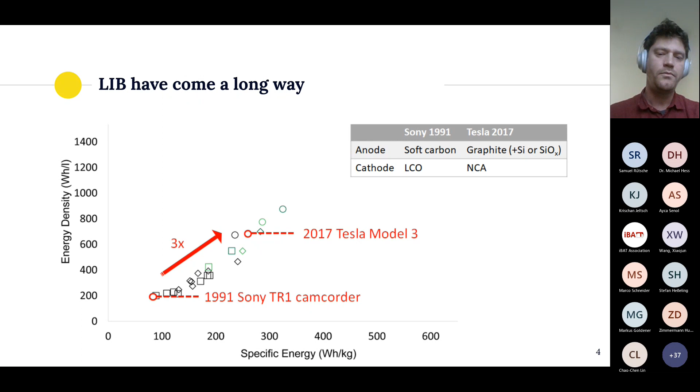However, nowadays we're sort of reaching what we think of as a practical limit. The cell design uses housings, current collectors, tabbing, all these design aspects that prevent us getting the most out of the theoretical limit of these batteries. So in terms of volumetric and gravimetric energy densities, the state of the art, which uses liquid electrolytes, is almost reaching a limit. They're still fairly expensive.

Well, every once in a while you hear about automakers that promise cheap electric vehicles, under 20,000 francs or dollars, maybe even less, but we're not quite there yet. And in terms of charging times, it's still underwhelming if you need to tell a petrol head that he has to stop for 30 minutes. And two aspects that gain more and more importance are safety and sustainability. As the battery market grows, those 2 points become more and more important.

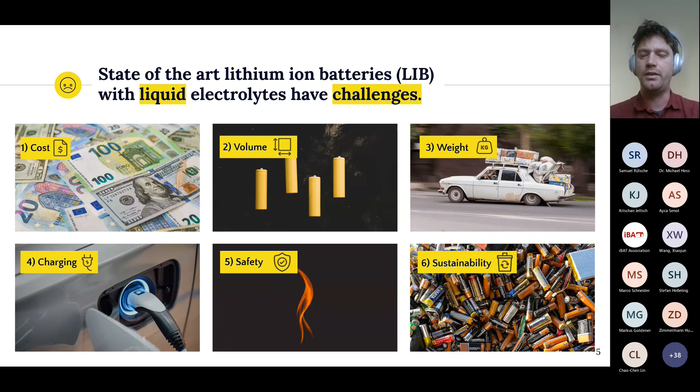And I really liked the publication by Placke, I believe it was in Nature Energy in 2018, that tried to summarize the ceiling of new battery materials and designs. And it becomes quite apparent that with the state of the art, it's really difficult to get another factor of 3 out of the performance of these types of batteries.

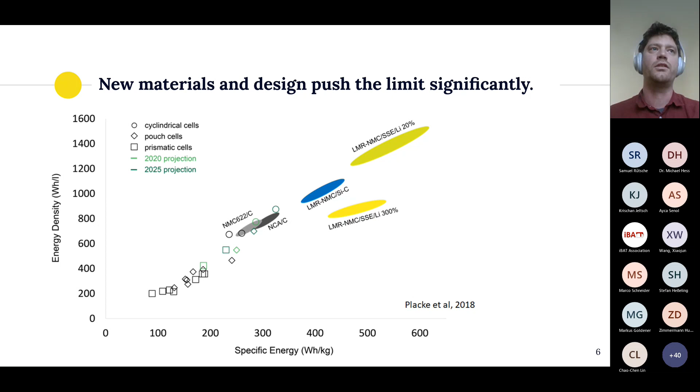But if you look beyond the state of the art, and solid-state electrolytes are probably closest on the development timeline, you see that this technology shift pushes the limit of battery technology significantly. And this is really, I believe, or what we believe at eightinks, what makes car companies and battery manufacturers pursue these types of designs, these types of materials. Not just the performance that they show now, but the potential that this technology brings.

And in our opinion, the future or the near-term future of lithium-ion batteries is very much linked to the future of e-mobility. The demands that this sector poses to the batteries are very, very high. The performance needs to be very, very good, so the automakers drive the technology development. Not necessarily in-house, but the market has such high demands on this technology that it's really difficult to focus on niche markets. And if you look closer, you can find this basically in every other battery report that focuses on the future of these different markets and sectors.

We are past the stage of the early adopters. I think lithium-ion batteries in the electric mobility field are here to stay. It's fairly clear. But the speed at which the market grows is mainly defined by the performance and the cost in the future. So this sector is developing very rapidly. The supply chain is being developed, and this is very hard to predict exactly. But in any case, it's a very, very fast growing sector at a very, very large size, which is unique for our generation.

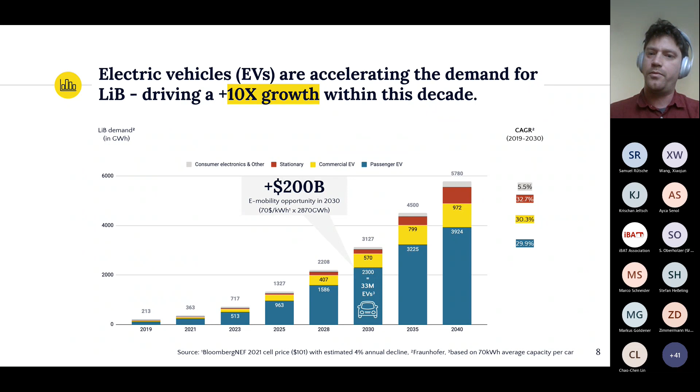So passenger electric vehicles are the sector that we focus on. And the first realization from our side is that the economies of scale for lithium-ion batteries absolutely matter. And for us, this means it's very difficult to start in a niche market or to start rolling out products for very, very few customers. Instead, you have to really focus on getting a gigascale infrastructure established. And this is where the European Union in and of itself is a little bit behind. So we really have to think big as a whole ecosystem to get to the ability to manufacture gigascale factories and roll out batteries at the largest possible scale.

And you can find academic publications on that, like here from Lukas Mauler in Applied Energy, but also I believe in the last couple of weeks there was a nice piece in the Intercalation Substack that talked about the economies of scale of lithium-ion batteries and the margins. And it was clear that the biggest players in the field have the highest margins. So I think this is something that we have to keep in mind, that it's not so easy to invest, for example, in a single player that tries to improve everything.

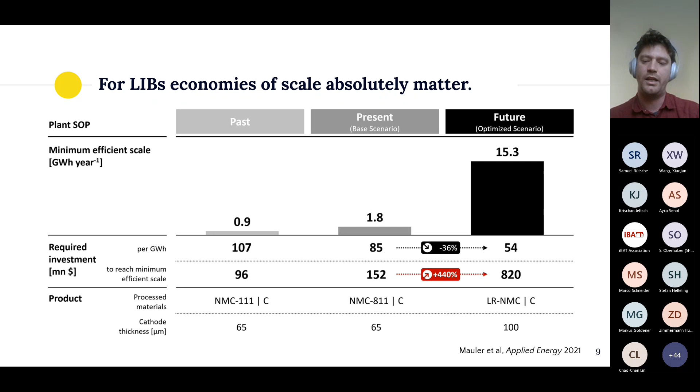For us, this means that you need to develop a clear focus as a startup, rather than rolling out a gigafactory all by yourself. This is a very ambitious goal that might not be so easy to achieve. So we focus on one part of the lithium-ion battery value chain, which is the coating, and I'll get to that later, and try to make that as scalable as possible.

With this growth of the sector, it doesn't stop at e-mobility. We've seen medical devices, consumer electronics, portable devices. We're now in EVs, but the technology will grow, and I believe trucking, road transport, or aviation will also build on lithium-ion batteries as the technology improves, as we see the technology shift towards, for example, solid-state batteries. And eventually, the numbers being produced for lithium-ion batteries will also enable grid storage. Maybe not with the exact same materials, but if the cell design is transferable, I believe grid storage is another promising application for lithium-ion batteries.

If you talk to players in the industry, and if you look at academic publications on where solid-state batteries are now, I believe the performance of these prototypes is really, really promising. And these types of batteries show a lot of potential. However, it's really difficult to predict when the technology will reach an industrial scale. And I believe one challenge to overcome is the production technology. And this is our lever at eightinks. This is what we focus on.

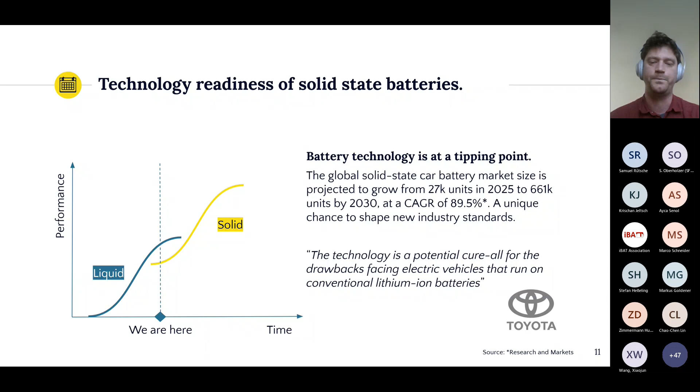I mentioned this in terms of performance values. The prototypes that are being produced by other startups out there depend on whether they're sulfide-based, oxide-based, or polymer-based solid electrolytes. They are all at a different technology readiness level, but none of them are being manufactured at giga scale. Polymers are probably the most advanced, but again, not compared to liquid electrolytes. These numbers don't compare yet.

But the prototypes for which the data is available show really good numbers in terms of volumetric energy densities, gravimetric energy densities, charging speed, and safety. Sometimes the size, so the capacity of these prototypes, is still not there yet, but in terms of composite batteries or polymer-based batteries, I think we have already seen fairly large devices being rolled out.

The remaining challenges that we see at eightinks are mainly centered around cost and sustainability. And cost, obviously: at some point, the performance is not enough if you want to compete in the electric vehicle market. So this is really a pillar that's missing.

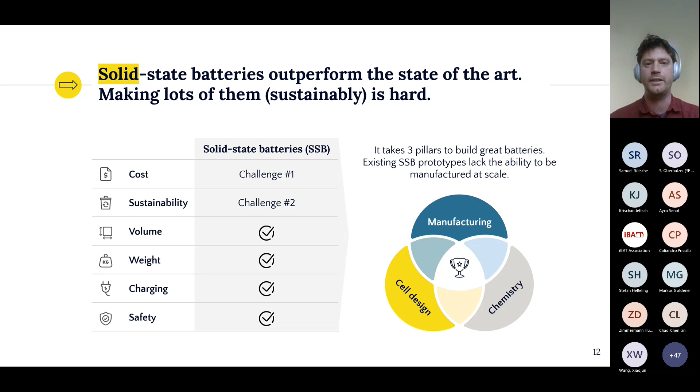And if you think about it, you can apply this to lead acid batteries, to zinc air batteries. They all look a little bit different. They have similarities, but there are differences that you can trace back to these 3 pillars. So it's really important to think about battery technology holistically. And as I mentioned before, we approach solid state batteries from the manufacturing angle.

At this point, I would like to briefly introduce the typical battery manufacturing steps as they are followed in today's factories. This typically starts with a mixing process. The active materials are combined with binders, conductive additives, and a suitable solvent to produce a slurry, a material that can be pumped and dosed at the coating station.

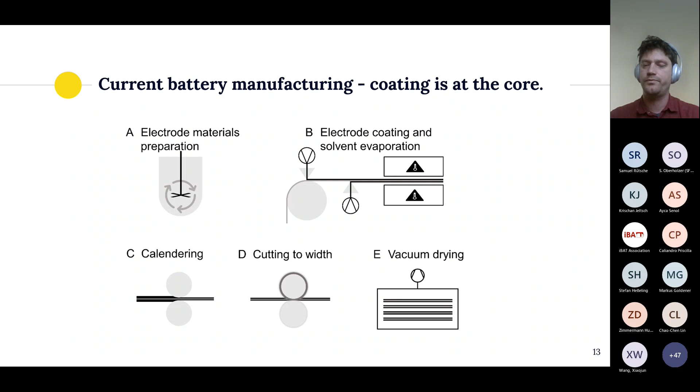Then you get rid of the excess moisture in a vacuum drying step. You continue by assembling your cathode roll with the corresponding anode and the separator. Again, depending on the format, there are different ways to do so, either through a Z-folding process where the separator is weaved in between cathode and anode alternating, or you can do a discrete stacking process or winding as you wish for your final cell format.

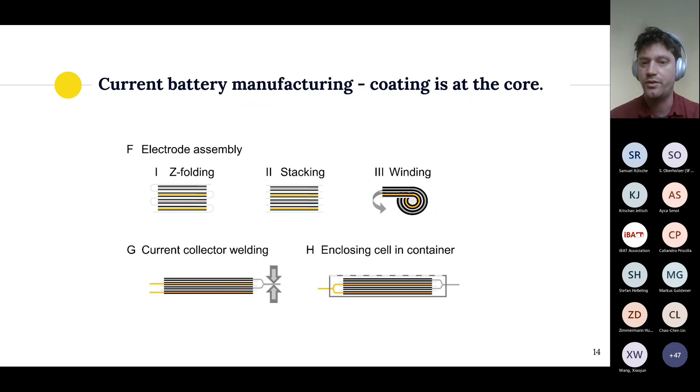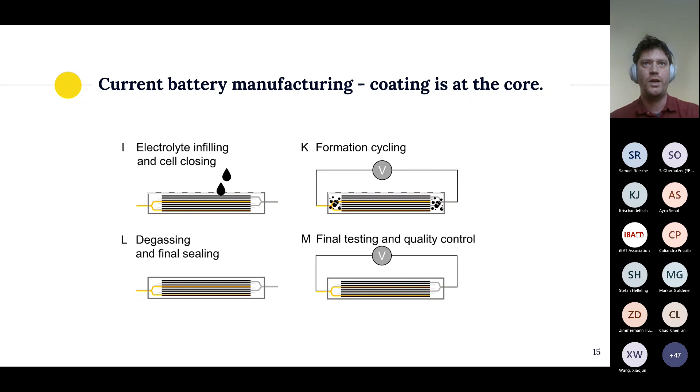Then obviously you need to combine the current collectors by welding the tabs together, enclose it into a container, and you're almost done. But then you need to infill the liquid electrolyte before closing the cell. This is typically done with a vacuum process. And you cannot ship the cells quite yet. Typically, the solid electrolyte interphase needs to be formed. So you do some formation cycling and some quality testing, depending on the cell format. You degas the byproducts of the formation process, and then and only then you're finished. So it's a very complex process in which many companies and stakeholders are involved.

For solid state batteries, our process started at the point where we thought that we need to be able to develop a solution that is ready to drop in seamlessly. So we didn't want to switch the technology completely, but solid electrolytes should be integrated into this manufacturing process with as few changes as possible.

However, they have some requirements that are not quite the same as cathodes or anodes, for example. You want to deposit the electrolytes at a thickness that should be lower than 30 micrometers, ideally as low as possible, as long as they're still functional and provide a uniform coverage. And again, you don't want to introduce a new bottleneck when coating your anode or cathode with these solid electrolyte materials. So the coverage speed should be similar to your anode or cathode speed.

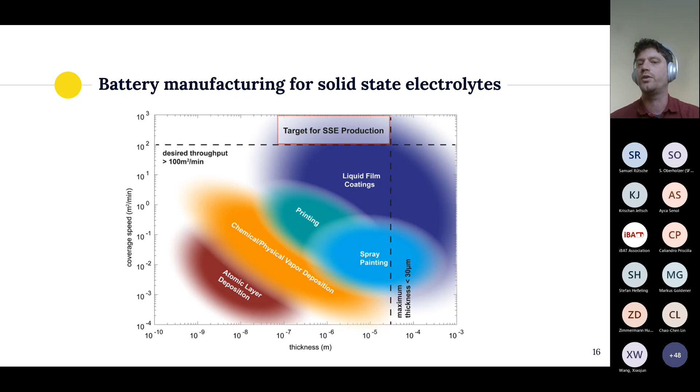So then we end up at the target for solid electrolyte production, for which typically only liquid film coatings are suitable. So we came up with a solution that solves the scalable manufacturing problem of solid state batteries. And this technology is curtain coating. It's a rather new angle on solid state batteries, but the basic idea is to deposit your active material and your solid electrolyte material at the same time.

So rather than pursuing a sequential approach, coating material A and then coating material B, you can combine both or more materials in a single deposition step. It is a liquid deposition technology that's compatible with existing infrastructure. As I said, you can coat multiple layers at the same time. You actually have the ability to coat at much larger speeds, and you have the ability to design your layers, the individual layers, thinner than the state of the art, which makes it especially suitable for solid electrolytes.

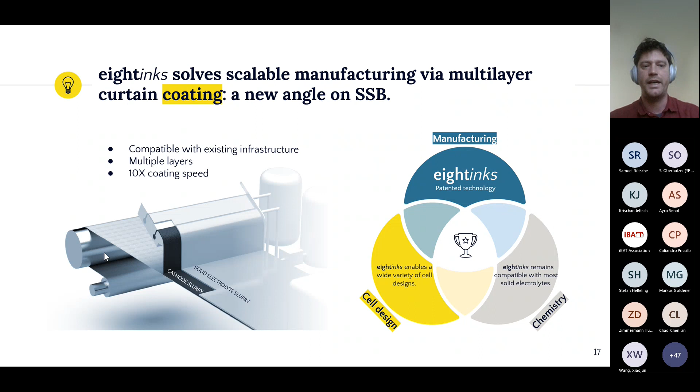Now, why is this so relevant? We basically rethink the coating step in the battery manufacturing process that I described beforehand, and we integrate the cell design into the coating step. And this makes the coating step just marginally more complex, but we do save a lot of capex and opex down the line. So after the coating step, the calendering process, the shaping process, and the assembly is simplified because the order and the alignment of the functional layers is taken care of within the coating step itself.

Obviously, the infilling process is gotten rid of as well. And depending on the type of material that you use for the solid electrolyte, we have a lot of room to save costs in the formation step. We have modeled this production in the BatPaC model to include these changes, and we estimate that we can roughly save up to 30% in terms of capex and opex.

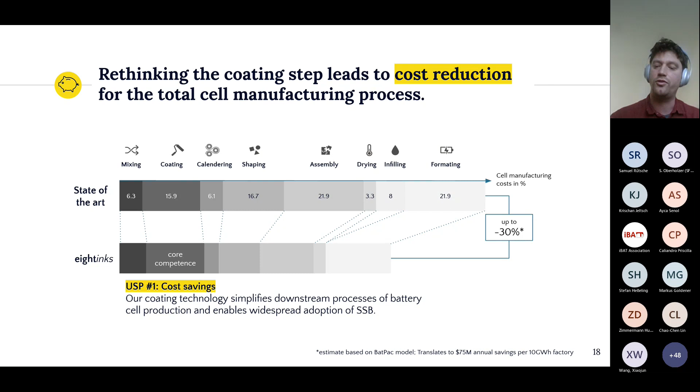And this is, again, maybe a good point to restate that we focus on getting the right materials deposited on a material. So the coating step is really the core of our technology, and we actually partner upstream and downstream with companies and institutions to be able to operate lean as a startup.

Now, the switch towards solid state batteries, in our opinion, is actually a unique chance to implement a circular economy. For the past 30 years, battery recycling has not been at the top of mind of most companies or people, just because the scale wasn't quite as relevant, but now recycling is one of the hottest topics ever, rightfully so. But we believe that if we are talking about a new technology like solid-state batteries, we should be talking about this technology in the context of a circular economy.

So we believe we should design those batteries with recyclability in mind. So our curtain coating technology, our multi-layer coating technology, actually allows us to do so. And we believe we can shape new industry standards and processes for these types of batteries. And now I think this is a good chance to look into the vision, how we believe these batteries should and could look in the future.

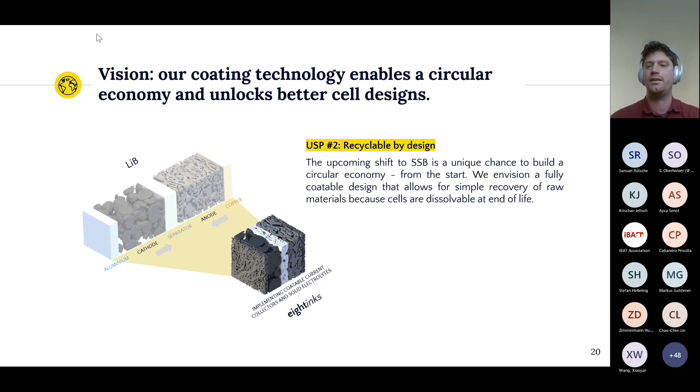And lastly, why is this relevant to make the layers thinner? This is actually probably contrary or opposite to most approaches, which follow a thick layer design to maximize gravimetric energy density. But this is basically bound by the use of current collectors that are made up of metal foils. So these have a certain thickness that needs to be kept in order to be able to coat and produce these batteries.

If we target a fully coatable design, just by the functionality of transporting electrons, these layers can be made thinner actually. So the electronic conductivity is high enough to make the layers thinner and keep the functionality of the batteries intact. This is a very complex process to be able to integrate in the coating process, but we've made good progress on that front. And this ties together our vision of how batteries should look in the future.

And this thin layer design is unique in that sense that it basically pulls the biggest lever for fast charging. The distance that the lithium ions have to travel within a battery is pretty much linear with the electrode thickness. At least it's the biggest lever. Obviously, we can tune alignment of electrodes or the conductivity of high-performance materials. But making batteries really thin allows us to charge batteries really fast. It's a fairly simple concept that we have in mind here.

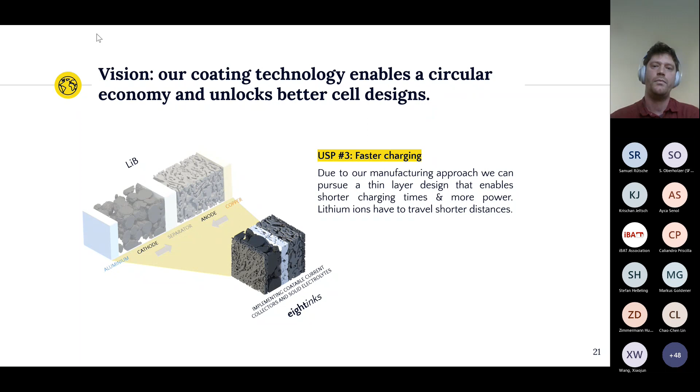All right, and why should battery recycling be reflected in the cell design already? Because we target a direct recycling approach. Direct recycling means basically recovering the active materials, most importantly the cathode active materials, in their particle shape and upcycling them. So we don't have to break down the battery to elementary composites, but if we keep the particles intact and relithiate them to battery grade, we can save a lot of energy.

So right now, battery recycling is dependent on many pyrometallurgical processes or hydrometallurgical processes, and this is great and awesome that batteries are being recycled more and more. But again, if we think about next generation battery technology, we should make it as recyclable as we can from the very beginning, which starts with the right cell design. All right.

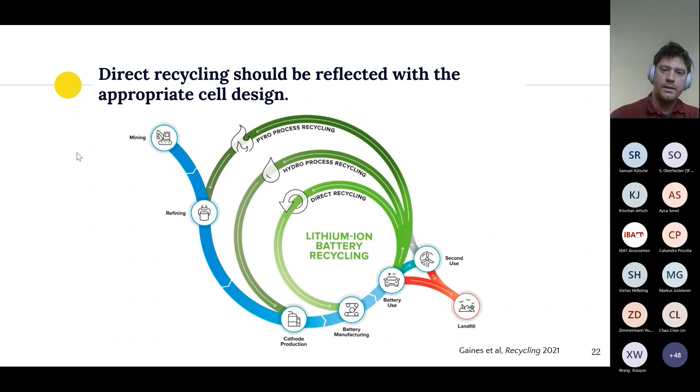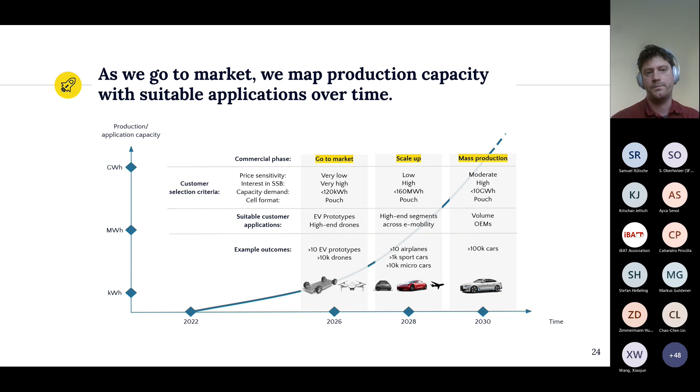I mentioned this earlier, so we are starting out with the coating process. Right now, we have the capability to coat 3 layers simultaneously. We can produce layers that are less than 15 microns in thickness, and we can coat individual sheets at 120 meters per minute or faster. This is all still in the lab scale.

We're preparing the rollout for roll-to-roll manufacturing, but this is what we can do at our own lab at the moment. We can coat solid electrolytes. We focus on polymers and composites with ceramics. We can coat active materials, both anode and cathode materials. And if in the audience you would like to do trials with an interface layer, customized materials that, for example, help with lithium plating, please reach out to us. I think we can coat that as well. We have the production know-how to make it into a great slurry.

And in-house, we also have the facilities to characterize the materials and electrodes themselves and assemble coin cells and test these coin cells electrochemically. So for pouch cell devices, we rely on partnerships, but we would like to integrate that by the end of the year in our own facility as well. All right.

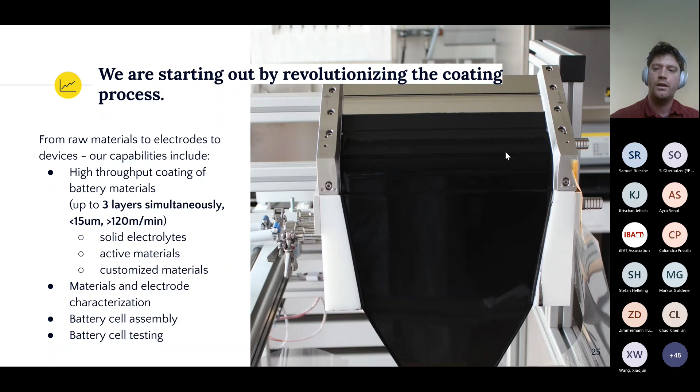All right. We moved into our own facility just a couple of months ago. We're now based in Schlieren, Zurich, and we have built up our own lab facility. We have new team additions. We actually have an open postdoc position at our research partner, the Materials and Device Engineering Group. We are always looking for interns, or if you're looking for a student thesis opportunity, reach out to us. And yeah, growing fast, and it's a challenge for a young startup, but we're quite happy with the progress so far.